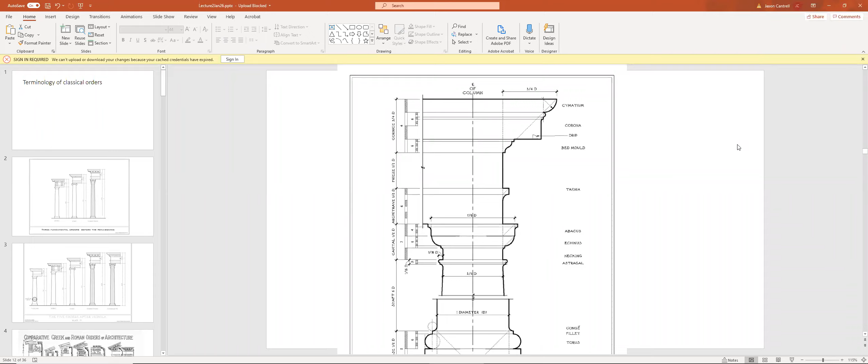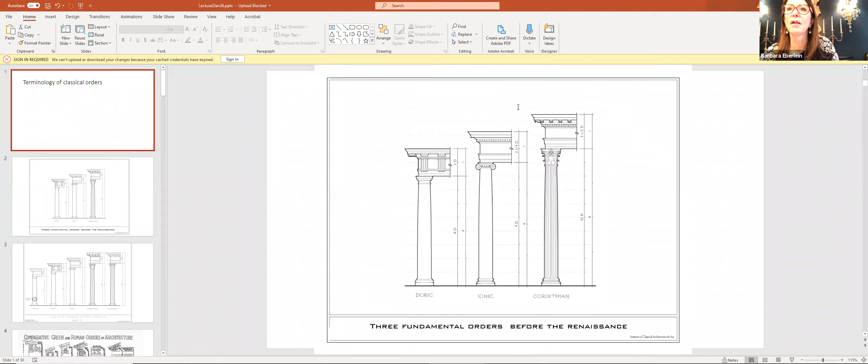Okay, I'm still trying to get things cleared up. If there's a way to enlarge those images, they are extremely small. Can you see the images right now? You can see them, they're extremely small. Oh, okay, are they not full screen? No.

They're in edit mode right now, not in presenter mode. Okay, we'll do that. So what about now? We're hoping to have the deck done within 3 weeks or so. I think we're overhearing someone's conversation. We're kind of gonna have to deal with it.

Okay, can everybody see the PDF file now? It's still in edit mode and not in full screen slideshow. Okay, what about now? Still in the edit mode.

So Jay, we see the PowerPoint the way that you do, with the slides on the left-hand side of your screen and the main slide, but it's not full screen. You're not in presentation mode unless you wanted to stay in edit mode so you can easily find slides, that's up to you. But it's hard to see some of the images, they're small because they're smaller on your screen as well.

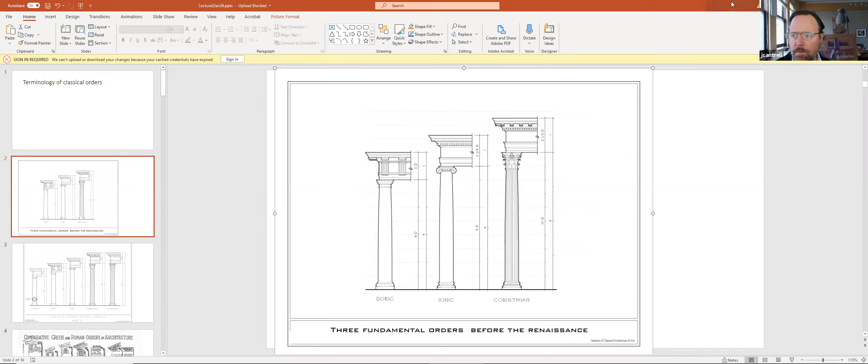I see, so edit mode, I need to get to that. I think if you go to slideshow, you can start presentation, or there's a way to, I can't remember exactly. You should be able to press F5, that button there. There we go. Oh, is this one better? Yep, thank you. Oh, good.

Okay, great, we're still trying to get everything clear and organized. So you can see terminology of classical orders at the proper size, right? Yes. Okay good, so again, this class is really going to be talking about the classical orders, the terminologies.

There's a lot of information. The photographs are a little bit more pleasing to look at than just the diagrams, but I'm just going to quickly show you what we're going to be talking about. We're just going to discuss the basic terminology of the classical orders, and I'm going to go back and look at these more clearly. There are some diagrams, some terms, some dimensions, some ideology.

So let's start with this one. I think for the most part, people are still a little bit on the fence about where these classical orders really originated from. There are really three basic orders that the ancient Greeks established, and I'm sure you've probably seen this before. I'm just trying to clarify some information. It's really the three: Doric, Ionic, and Corinthian.

Then later the Romans added the Tuscan order, which is the simplest order. And in the Renaissance, they added the composite order. So there are really 5 classical orders established: Tuscan, Doric, Ionic, Corinthian, and composite. Really the 3 existed during Greek structure and society. It wasn't until the Renaissance that they added composite, and then the Tuscan order during the Romans.

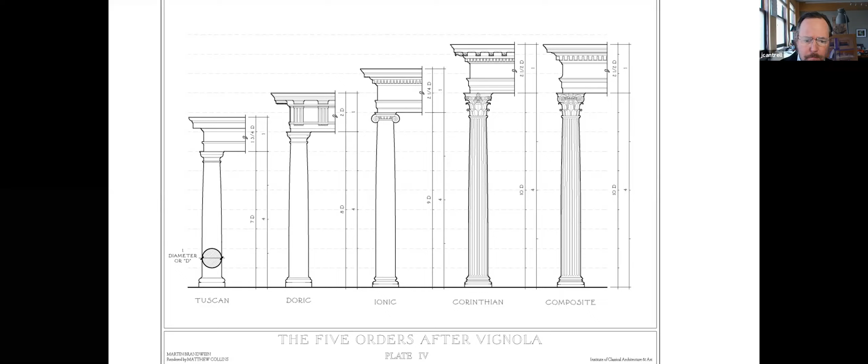I think by now you've probably seen hundreds of charts and diagrams about how the columns are actually drawn, the different nomenclature, the different types. There's a big difference between Greek orders and Roman orders. We'll talk about that more specifically.

They're going to be discussing how these things are properly designed and proportioned. There's some very basic fundamental information that each one of these classical orders has. I think some of you are probably writing notes in your sketchbook that you'll show your students.

This is kind of just an hour overview of some of the information. I taught a drawing class how we properly drew and proportioned these things. More specifically later, I'll talk about how every little part of this is really proportioned based on the diameter of the columns. Let me know if I'm going too fast. I'm just showing you what we're going to talk about briefly, then we'll get into more specifics - how to properly draw and measure these details.

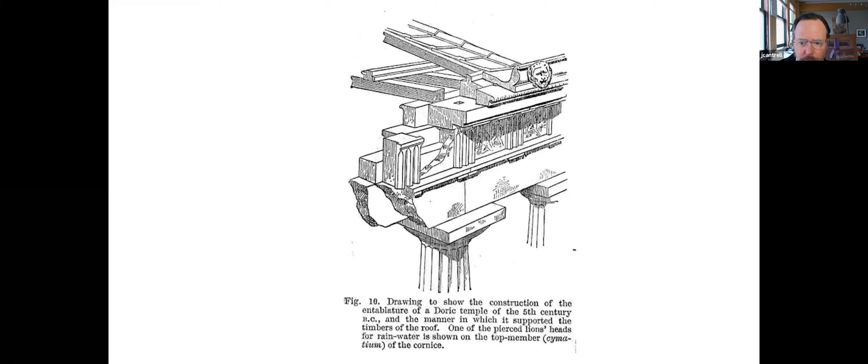Okay, so I want to go up and start with this. I mentioned earlier that there's really 3 basic ones, then there's really 5 main ones. Tuscan was added, and then Composite was added during the Renaissance.

You could definitely tell this chart shows - I mentioned this in my class a few days ago - that the proportion of things is really based on the number of diameters, the height of the columns. For example, the Tuscan order has 7 diameters that determine the height. The Doric column is much taller, it has 8 diameters. The Ionic column has 9 diameters. The Corinthian column has 10 diameters, and of course the Composite one does too. You can tell that gradually they get larger and larger from Tuscan all the way to Composite.

Each has their own specific entablature, which we'll talk about in a minute. We'll talk about this chart a little bit later, but there is a difference between Greek orders and Roman orders - they're similar, but very different.

What I'd like to do is identify the 3 basic essential parts for each columnar order. You can write these in your sketchbook, I'll give you some time to put notes. For the most part, there is the columnar element, the shaft of the column, then there's the capital, then the top of the building is the entablature. You can see on the left, the entablature - don't worry about the numbers just yet.

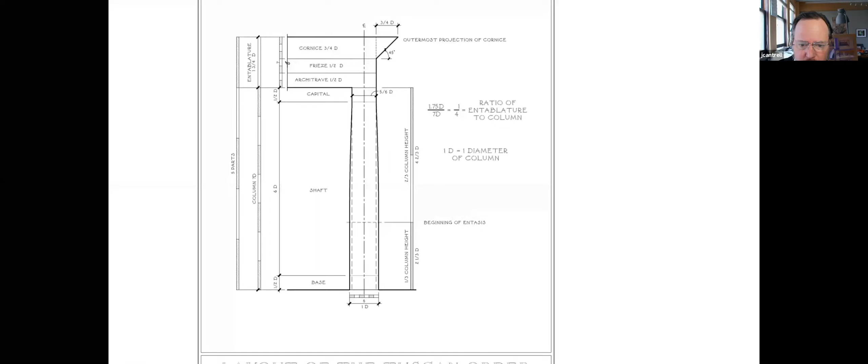Yeah, so this is in more specific terms. Can you guys still see that? Okay good. So again, as I mentioned earlier, there's a very careful way to design the sizes of these things.

In our classical moldings class, we talked about how pretty much all the moldings are really determined by the width of the column. The little numbers on the left show every little dimension is based on a certain dimension for the column. By the time the base is a full base, by the time it reaches the capital, the tapering diminishes the width of the column to where it's roughly about 5/6 of the diameter of the entire column.

If you look at where it says the bed mold, which is the transition between the cornice and the frieze, the taenia is the little square piece. Each little increment is based on the diameter of the column. It's really interesting to see that that's how they determine the height and dimension of every little part of this.

If you look at where it says frieze on the left, the frieze is half of the diameter. The height is determined by half of the diameter of the base. So really, the frieze and architrave are 2 exact equal parts. Then the cornice is much larger than that.

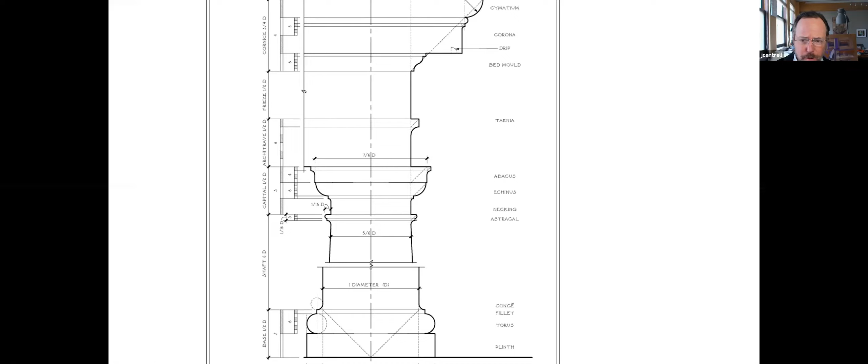Of course, this is a more careful drawing using the dimensions of the column to determine pretty much every little piece or part. The same thing with this one.

When I taught the drawing class, we actually spent an entire day properly drawing each one of these. This is the Tuscan order, the simplest order. If we were to carefully draw each of the orders, it would take probably weeks, because we use a system of 45-degree diagonals to determine how to properly size the top of the capital, the curved part, and the other moldings underneath.

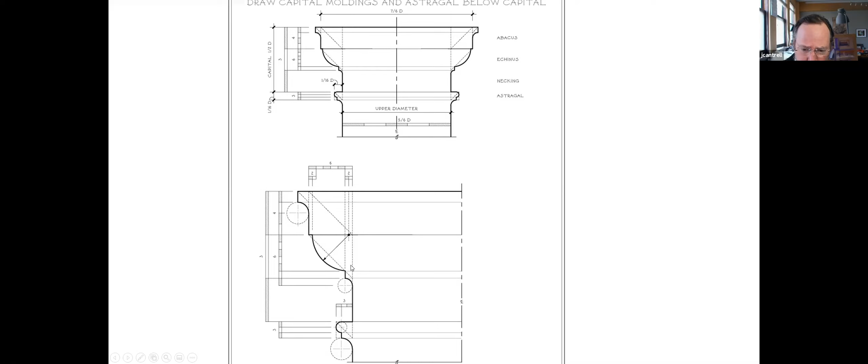This is more detailed—this is the Doric order, which has the more explicit parts in the frieze. This is a very common classical entablature detail because it shows the triglyphs, the part centered at each column. The metope is a non-structural member, meaning it's the space between the original wooden beams in the early Etruscan temples, which we'll look at in a minute. So the frieze comprises the metope and the triglyphs.

The triglyphs were really originally the ends of wooden beams in the Etruscan temple. Now they're using stone and marble to abstract the ends of each of the three pieces of wood that would comprise the beam.

A lot of these parts look decorative, but they're very carefully and specifically designed in place. If you look at this, the taenia—which is actually technically the astragal—separates the gap between the frieze and the architrave; these are the bottoms of little nail heads, because this nails the wooden boards into the base of what's called the architrave. So those diagonals aren't just to look pretty—they represent the nail heads at the bottom that used to connect the beam to the front part of the architrave, or lintel. The lintel, header, and architrave are really interchangeable terms, referring to the structural horizontal beams between each column.

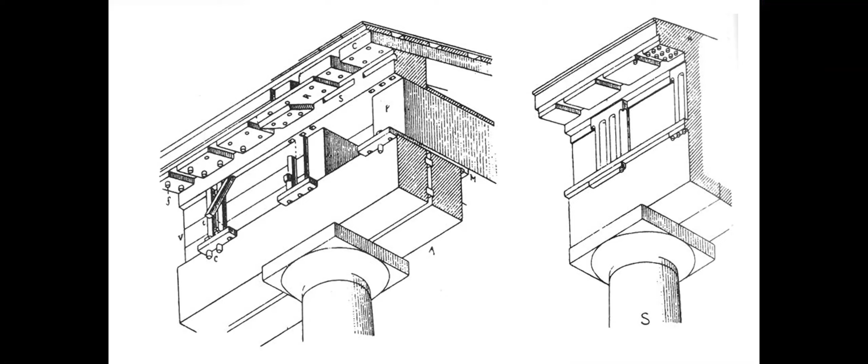We have a question asking what was the original function of the mutules. I think those are actually, well technically, it's really strange to have a cantilever in classical architecture, but I think these are brackets to support the projected cornice, because look how far that cornice extends, it's actually one entire diameter away from the edge of the structure. So these technically would have been brackets to hold up the cornice at the top. That's a good question.

There was also a fun fact added saying that in art, figure proportions are based on head heights. Average height is 7.5 heads high, ideal figure is 8 heads high, and heroic is 9 heads high.

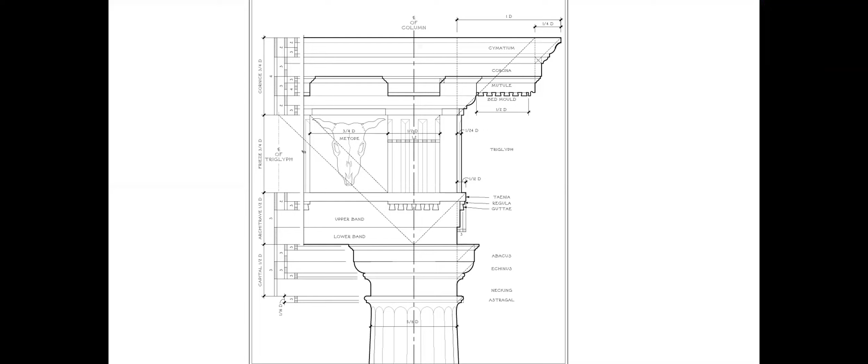Carolyn added, makes me wonder if the classical orders of columns and figurative art are related. Yes, I'm sure they are. There's also some anthropomorphic relationships, which I don't have images of. But when you say head height, you mean human head heights? Because these are temples built for gods, not really the scale of people. Yeah, she was talking about figurative art being in proportion to a human head height. I'm not sure I have a good answer for that, but I can look that up and get back to you.

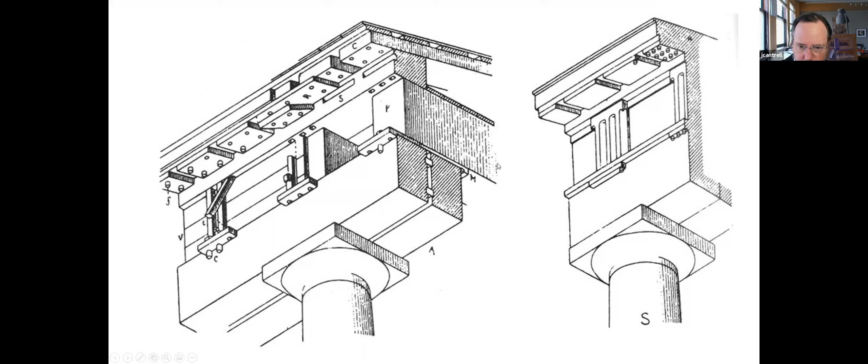Here's another, more elaborate detail about the way the early temples were derived. Of course these look like stylistic details, but they're really very meaningful because they're showing you these are the ends of what used to be the wooden beams.

What's interesting is when you compare Greek and Roman architecture, the span of Roman architecture is much wider because behind that you're using a system of masonry arches. So the spans in Greek architecture, the lintel of the architrave, are relatively short because their structural capabilities didn't allow them to make the architrave really long and elongated.

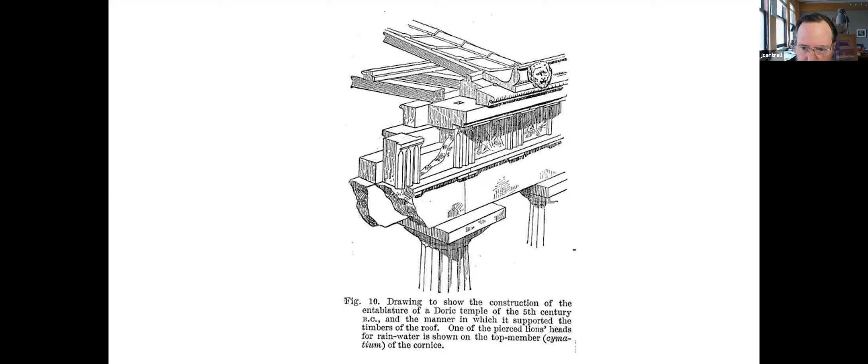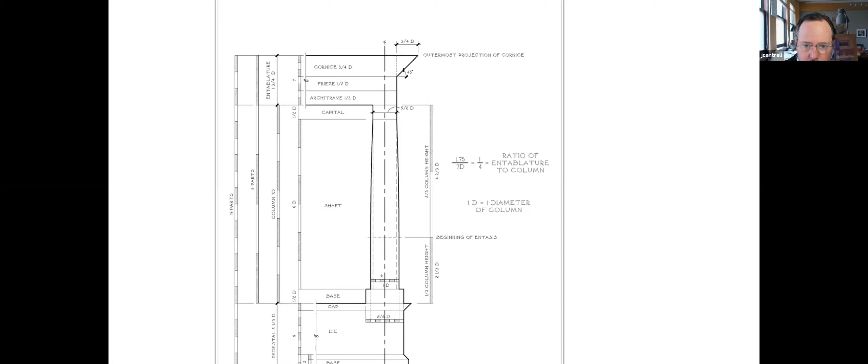We see the column, the length of the column with the shaft, the capital, then the entire entablature, the architrave, the frieze, and of course the cornice.

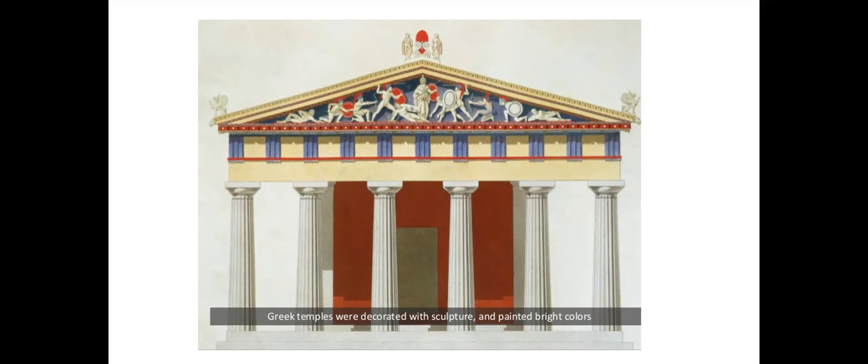We have a question asking, are the corner columns larger than the interior ones? Excellent question - I think it's visibly hard to tell. Especially in this example, they're all the same size because they were using what's called optical refinement. So to answer your question, yes, the end columns are marginally larger than the interior columns. It's hard to see because the center of the architecture is very important and sacred, so the width there is actually a little larger than the other spacing of the columns.

It's really hard to tell, but there's tons of research showing they actually accommodated the curvature of the earth in some of the dimensions, which you can't visibly tell by eye. It's amazing to think they considered that before they even had laser transits or pneumatic tools to work with.

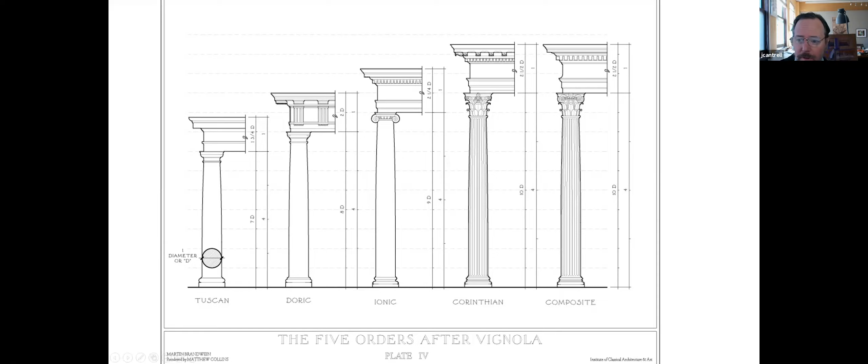We talked about the aqueduct. It's interesting that with the Romans, you would never expect to see the classical orders—the Greek Doric, Ionic, Corinthian—but of course these are really not meant to be seen and appreciated as a piece of architecture. These are simply just the structures. You would never see the classical orders on this, for the most part a large drain pipe, but you would definitely see them on public buildings.

It's interesting to see you can see the orthogonal Greek structure behind the classical orders and behind the Colosseum, and of course they're round, and then of course the arches in the Roman architecture.

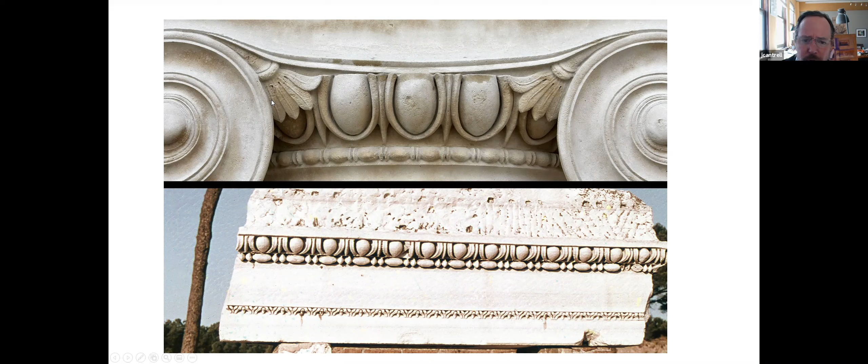Again, this is Michelangelo's incredibly layered, imaginative interpretation of the Ionic order.

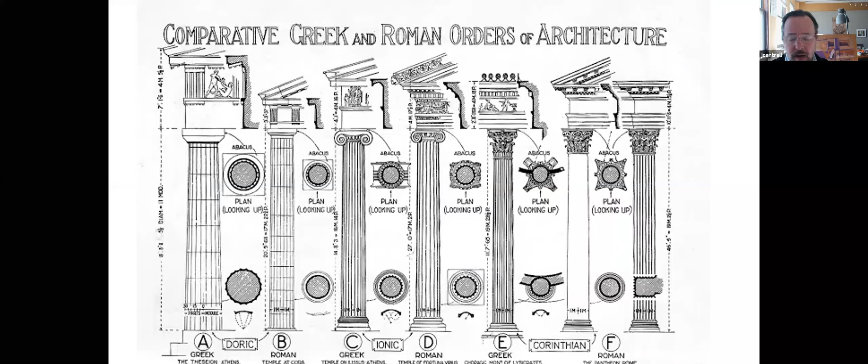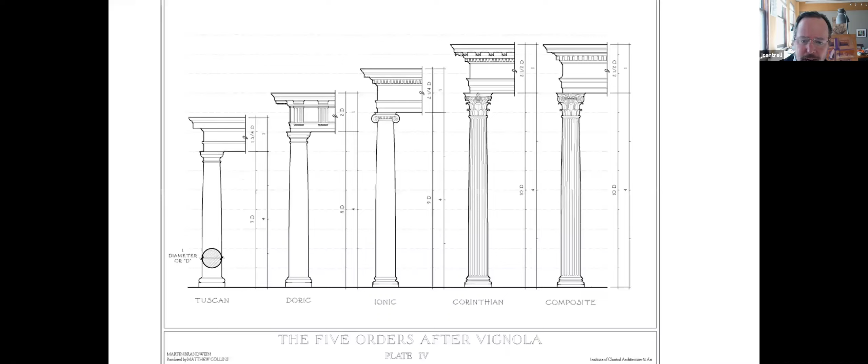We went over a lot of information—this is just a brief overview. A lot of these images were drawn by members of the ICAA, and some are taken from the Vignola book. I'll condense this down as a PDF file, but I think it's interesting that no matter what the columnar order is, there's still those basic parts: the shaft, the cornice, the frieze, and the architrave—carefully done, carefully thought out, carefully carved, based on every little increment relative to the diameter of the column.

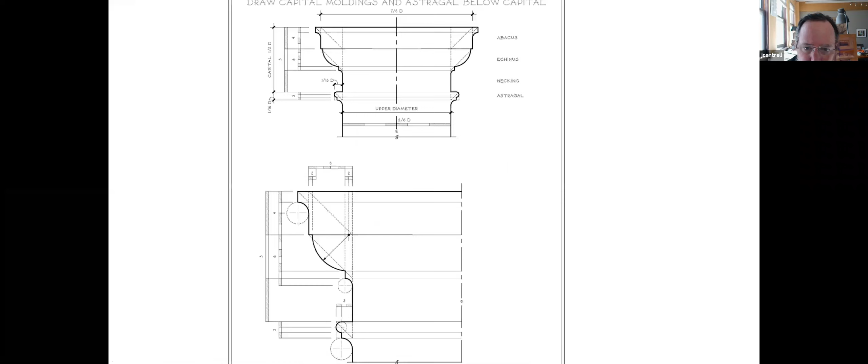If I were you, I would look more at Michelangelo's work. A lot of people think he's this kind of tired Renaissance architect, but my gosh, look what he did with the classical language—he didn't just completely lose course, he interpreted it in a very brilliant way.

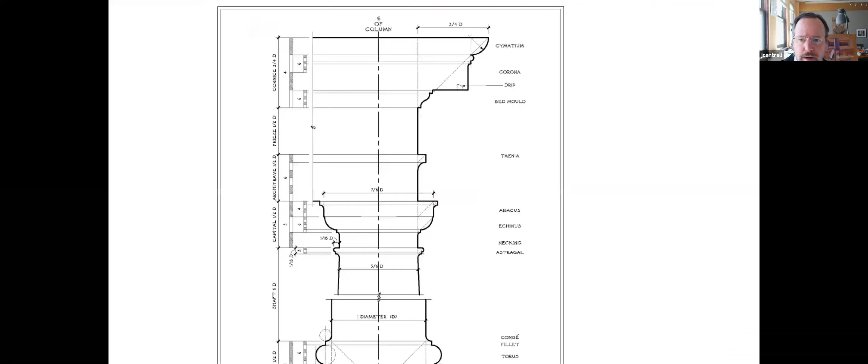This is just a very brief overview of the language of classical terminology—we talked about a lot of terms. Michelle, I think Valerie and I can get together and put together a closing PDF to email to the students in the class.